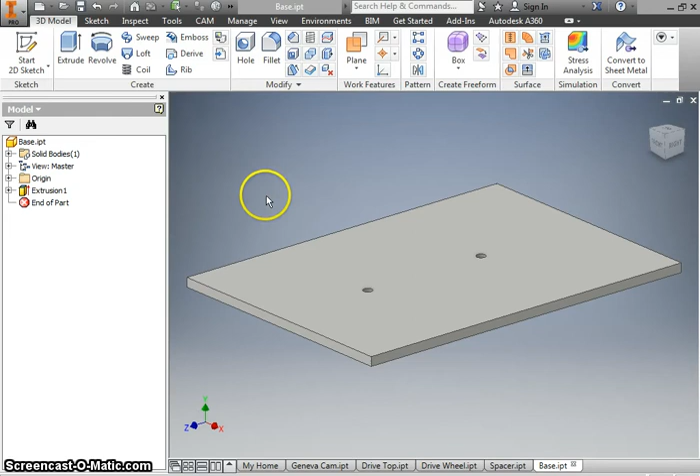So, let's go back up here, and instead of making a new part, we're going to make a new assembly. Sometimes this will pop up where it says place from content center. Hit the drop down under it and just go to place instead. And when you hit place, now it's going to look in the folder that you created for your project.

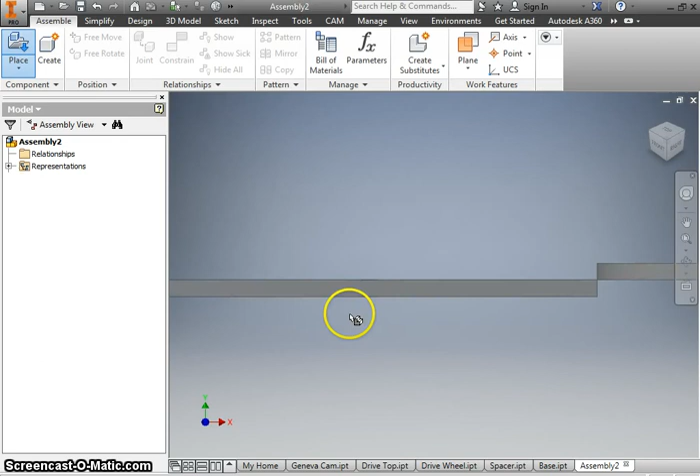Click on the first one, hold down shift, and then click on the last one. You don't have to drag, just click the first, click the last. Go to open and click somewhere inside the window. Okay, now I have this set up in a special way. I believe this piece is the biggest one, and it needs spaced up above this piece here.

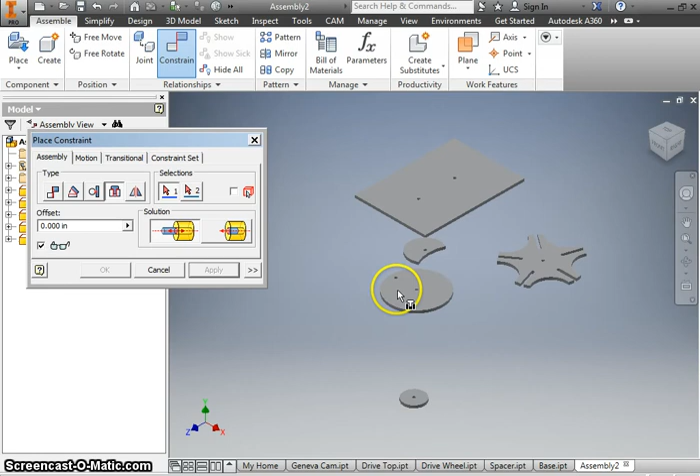So let's go to constraint, and we're going to use the insert constraint. The insert constraint combines a mate with a flush. Doesn't really mean a whole lot to you. Basically what it means is that it's going to take the edge of this hole and make it touch the edge of this other one over here.

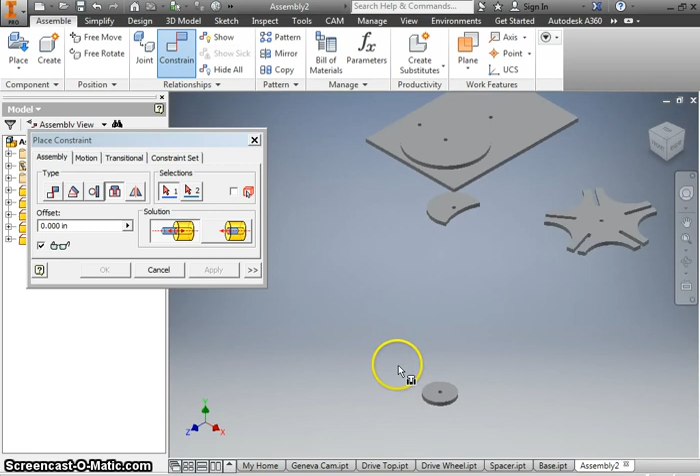Hit apply. I'm going to put my spacer down first, so I still have insert selected. Click the edge of that, the edge of this hole here, hit apply. Now I want to double check, and here it's really hard to see what's going on, so instead I'm going to click this, go up here to this little ball thing, there's a double arrow next to it, and we're going to change the color to something else.

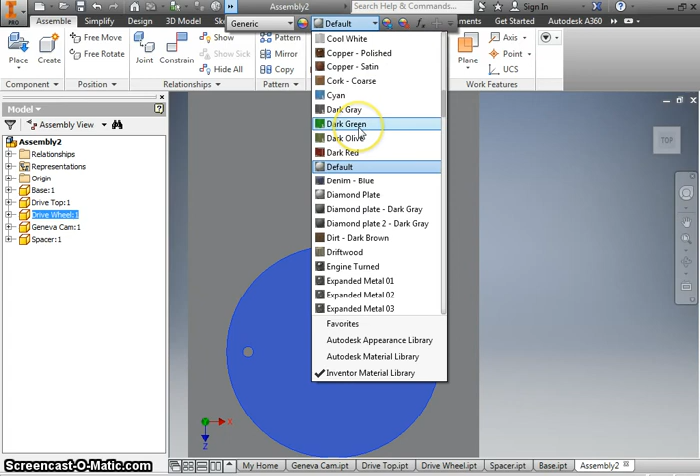We'll make it dark green for now, and we'll make this other thing next to it a different color so we can see what's going on. Really up to you. We're going to make this one black. So I want to see that these two things are not going to bump into each other, and there's a little space in between. So that's good. And I also want to make sure this isn't going off the edge here.

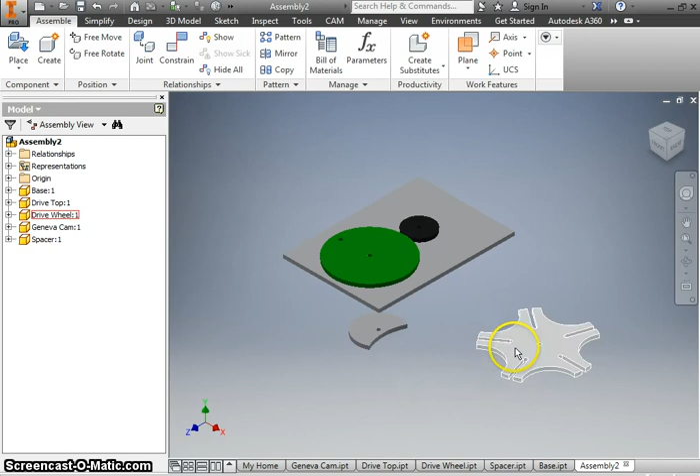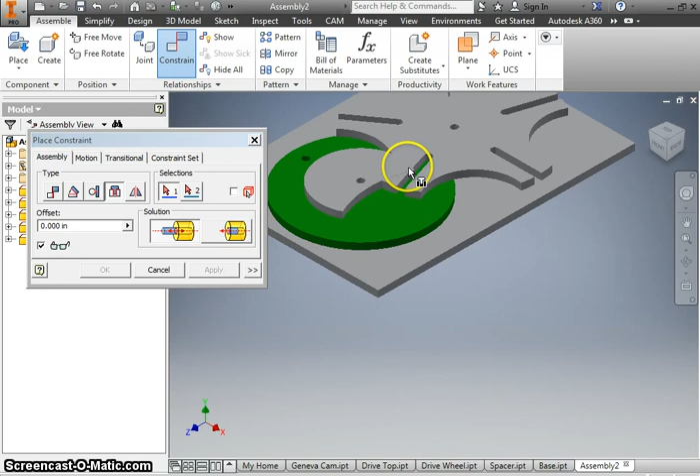Next, I'm going to go back to an insert constraint. That's this one. And I'm going to put that Geneva Cam on top of the spacer and hit apply. And lastly, I'm going to grab this drive top and mount it on top of here. Okay, now I don't want the drive top to go through the Geneva Cam, and it also has to be aligned just perfectly with that. So, how we're going to make this work is if you double click the green wheel.

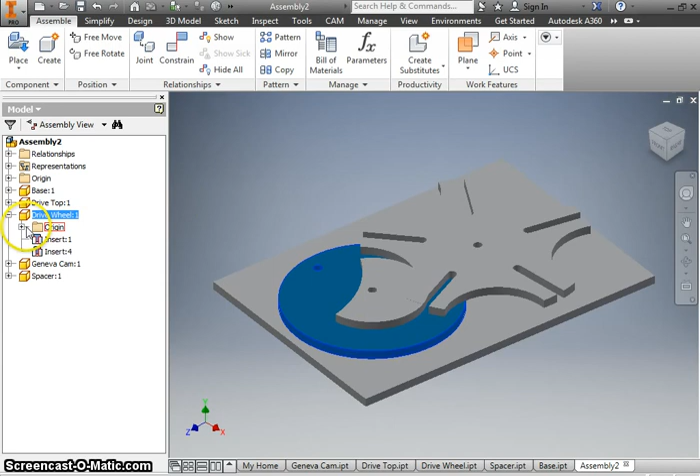Actually, you don't even have to double click it. If you double click the green wheel, you can edit it. Single click it, it'll show up over here, and go to the origin folder, hit the plus sign next to it, and find the plane that goes through the middle of that hole. Right click it and make it visible. I don't see where it says visible. Alright, fine. We'll double click it first. So we are here. Find that plane again, right click, check visibility.

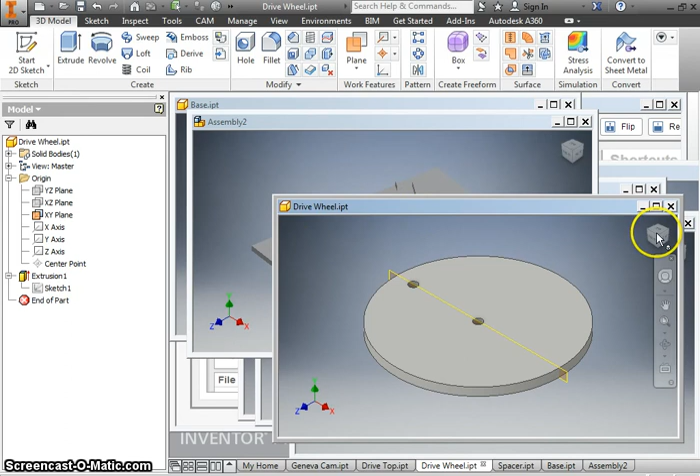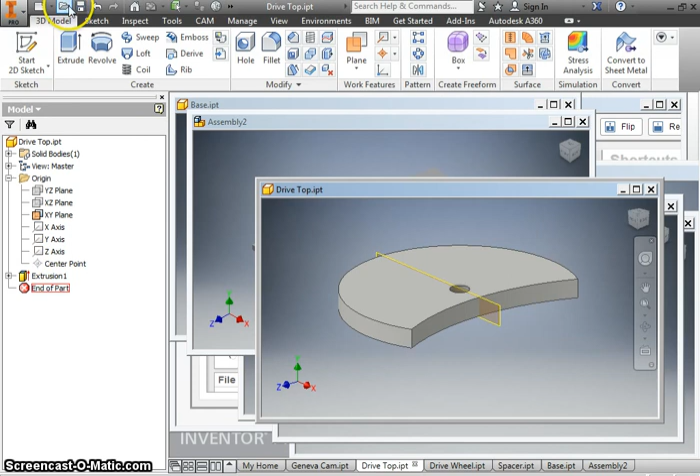And save that. Go back into our assembly. See if it'll let us make this visible from this screen or not. Doesn't want to, so we'll double click it instead, and in the origin folder find the plane that goes through the middle of that hole, right click and say visibility. Save that again. I'm going to exit out some of these things that are not the assembly. So now we just have this left to look at.

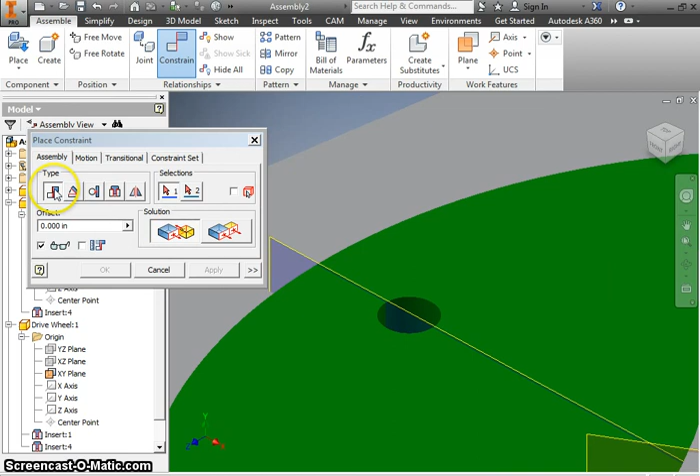And now that I can see those planes, I'm going to say constrain, and instead of clicking on a part, I have this on mate, by the way, I'm going to click on the XY plane and the XY plane here and hit apply. Alright, and now if I right click on this base piece, so first click to select it, turn it blue, then right click and go to where it says grounded. Now if I try and click and drag things, they'll all stay fixed in place.

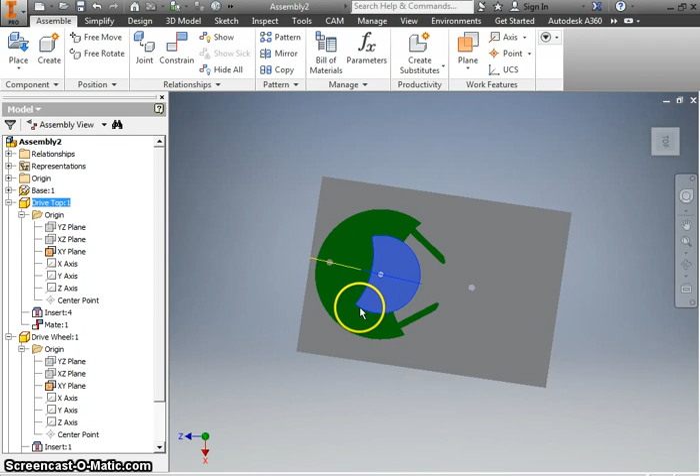And I would want to see that these are going to clear each other. I believe they will. Actually, I know they will. I've already tested this. So, this should all be good. And you have your first project assembled. Now it's time to make drawings.

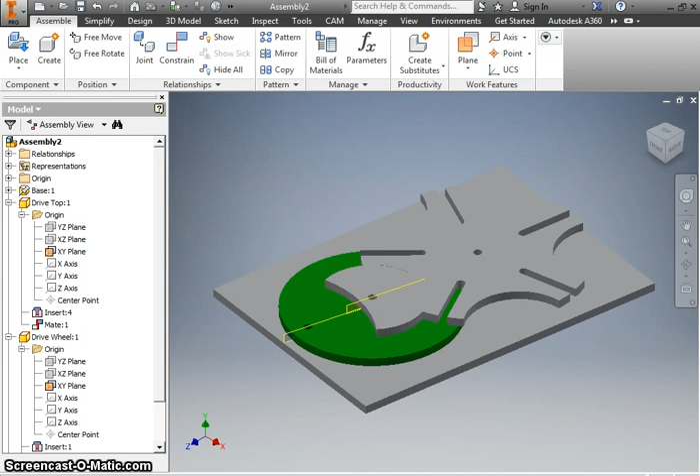Yeah, that should be good. If you want to change the colors of some of these other things, again, you just click it to show it's selected. Go up next to the ball, and then under default, just go ahead and change that to something you think looks nice.